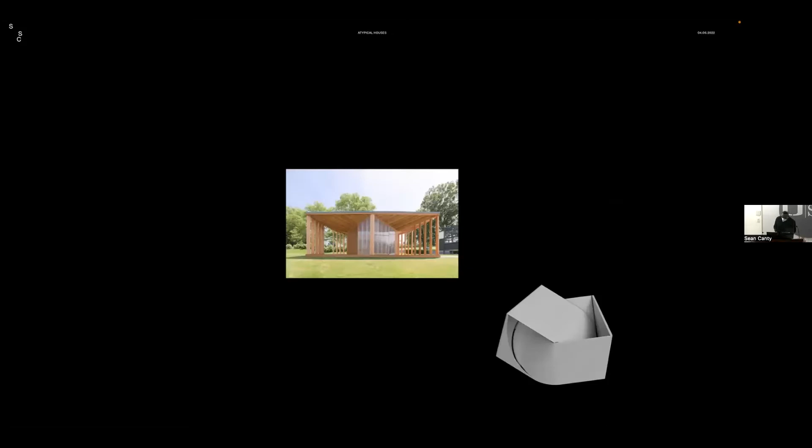The studio has worked on a range of projects over the course of the 5 years it's been operating, from pavilions to single-family dwellings, to multi-family dwellings, to large-scale collective housing, trying to find opportunities to interrelate the abstractions of form or geometry with certain conditions of typology, either as a kind of spatial organizer or sometimes the image of type. And how both of these things intersect to frame spaces that are social in some sense.

So there's a spectrum of projects I've been working on, some in the realm of speculations, some that are pavilions, which I call proto-architectures, and then buildings. I wanted to get started because the speculations and pavilions are quite important, and there's a mode of working in the practice that centers this idea of tangency.

As a way of, one, literally going off on a tangent and coming back to a kind of core idea, or finding continuity between different aspects of the work or different aspects of the discipline.

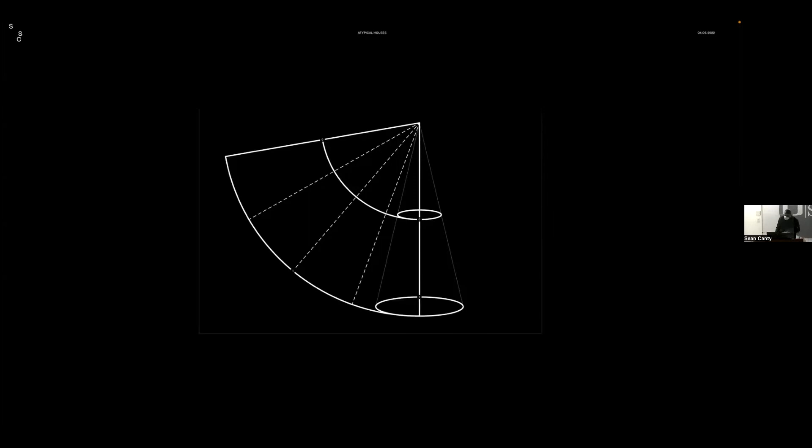And perhaps a precedent that always lingers with me is one I discovered as a grad student in The Projective Cast by Robin Evans, in the chapter Drawn Stone, where he articulates a story around this study that was produced by the architect and geometer Philibert Delorme.

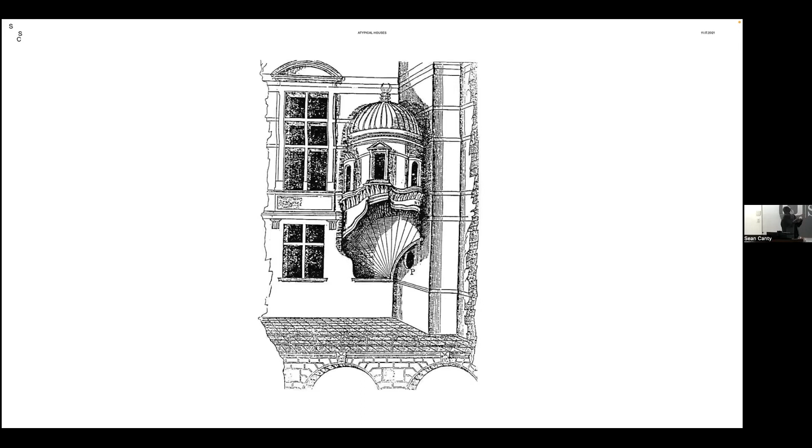And there was no space in the plan of the existing hotel to produce the study, and therefore it had to engage the corner. So it's a very peculiar condition because it's so miniature, a miniature piece of architecture compared to the hotel and the space of that courtyard.

There's a kind of paradox in terms of the scale, a paradox in terms of a room engaging a corner on the outside. To see a room in this way is kind of weird.

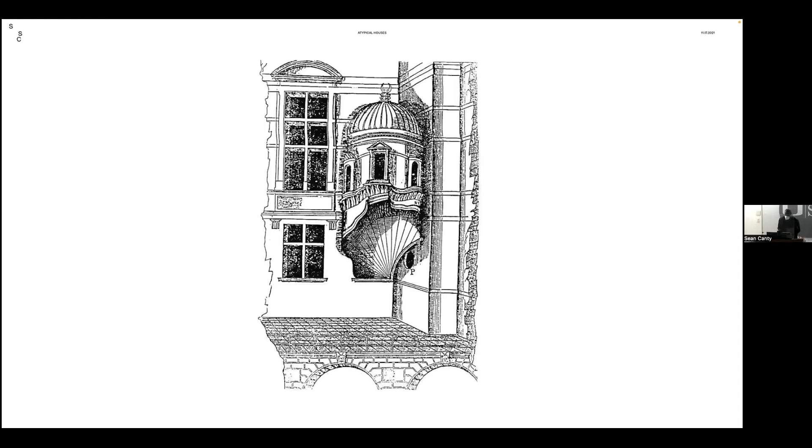And then the one that I like the most is this plan, these two drawings by Robin Evans, who reconstructs this process and beautifully renders this condition by which the conical arch structurally supports the tower of the study above.

And dives into the surface of the existing corner. So it reads as both, on the top part of the composition, as an additive condition, but beneath it, it is subtractive. And both of these perceptual readings can exist in one proposition.

That is in part through, well, there's a third thing. My speculation is that the reason why this is called Drawn Stone is not only because of the chapter being called Drawn Stone, not only because of the use of projection or unrolling to organize material on the flat plane, but also the way the architect treats the edge of the study.

It looks like a drawing that's been sketched in here, and it's a sketchiness that I love so much. But also this condition of building both additive and subtractive, or both-and.

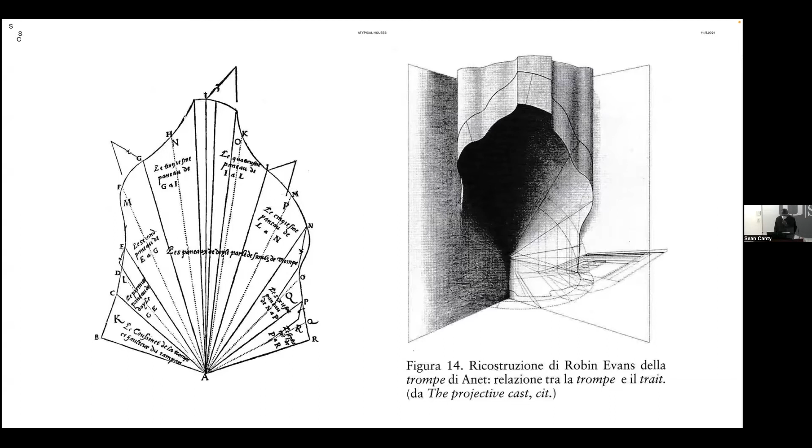So we love finding these anachronistic strategies of dealing with form and geometry, studying them and looking at them on their own terms, and then seeing if they have applications in some of the work that we might be doing.

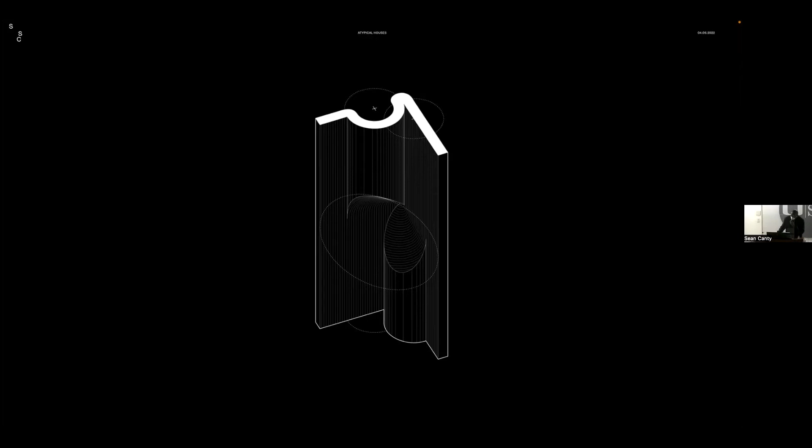In this case, we produced a series of corner conditions of our own that are misbehaved in other ways, where we kind of rub out cylinders into the flatness of a surface, and scale them in weird ways.

We double them up, we pair one and single out the other, or we have a kind of double scoop at the top and bottom.

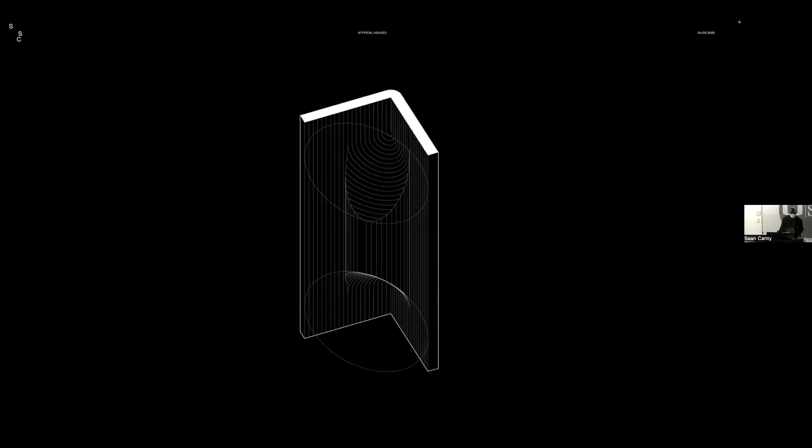This was a final drawing produced in 2D, which tries to begin to suggest the material organization for those forms, and it was submitted to an exhibition at the CCA in San Francisco called Drawing Codes.

Part of the research was actually looking at the kind of codes that Delorme was operating with at the time, using knowledge both in the realm of architecture and in the realm of stonemasons to produce that exceptional condition.

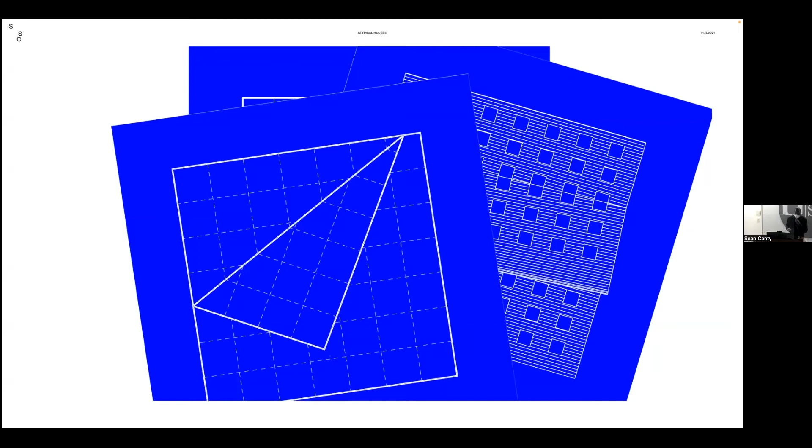We also do these kind of formal digressions as a side to the ongoing work, as a way of thinking in a very disciplined way about how to engage form, but also to find ways of relaxing it too, in a very disciplined way as well. So trying to be both rigorous and casual at the same time.

A project we're currently working on now is for a gallery in New York City, where we're thinking about this question of development at the scale of an object or a piece of furniture. This is the Swirly Stool and Table, where two semicircles of different scale sizes share a seam, and at that seam produces a fold that then turns into a vertical that supports the stool and the table.

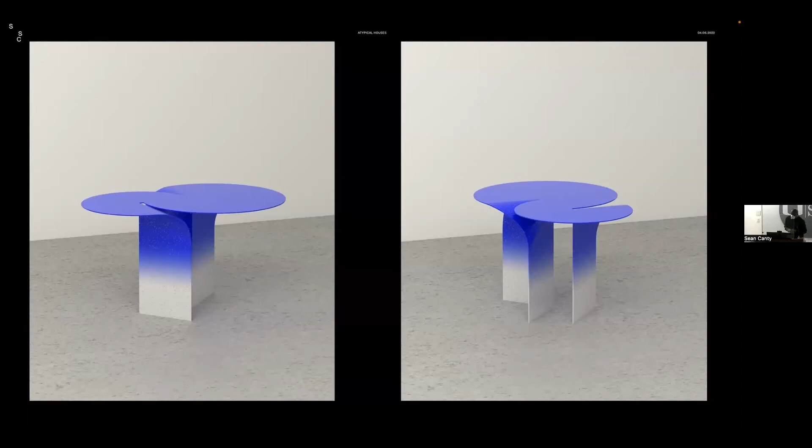We use color to highlight that moment of transition between the flat and the vertical, or the horizontal and the vertical, playing into the ambiguity of that transition.

A lot of the constraint is trying to get these things to constantly not self-intersect when they roll down into the flat plane, but that they maintain some logic of tangency in the unrolled state, so they can be made from a single sheet of material, in this case sheet metal. This is just a different version of that.

Last summer we also had the opportunity of participating in an exhibition called Not for Construction. As you can imagine, that's exactly the theme of the exhibit—to think about modes of drawing and representation that aren't output as architecture as a service delivered to a client or contractor, but more as a kind of intellectual conjecture.

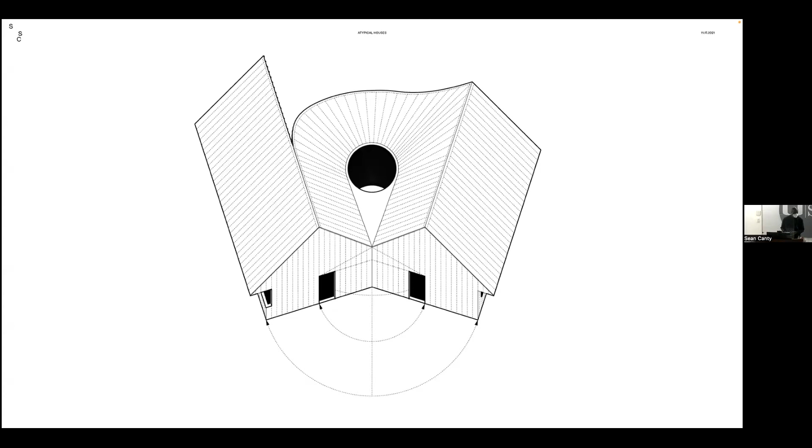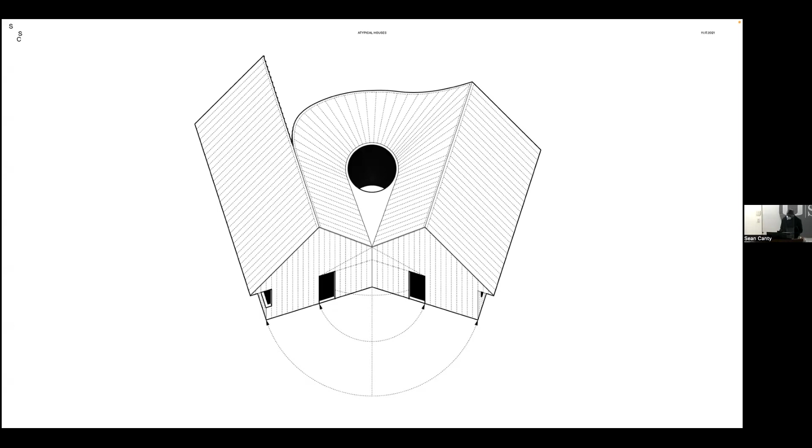In this case, we were thinking about the ways we might consider densifying suburban lots and revisiting typologies that aren't only single family housing, but thinking about alternative ways of living together. So the Janus House tries to conjoin two single family homes into one architectural volume, and in the process we were playing on questions of typology.

So we were revisiting a southern type of shed called the dog trot, where you have two twin gables separated by an open breezeway. It's very axial as a typology, and the breezeway is performative, cooling the house in hotter conditions.

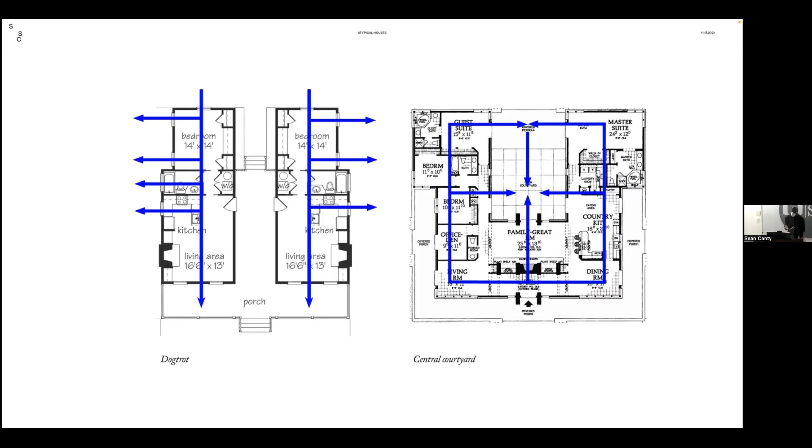And then the courtyard, which can be three-sided or rectangular or circular, but the courtyard always has a perimeter and a center. So how could we conflate these two logics into one house?

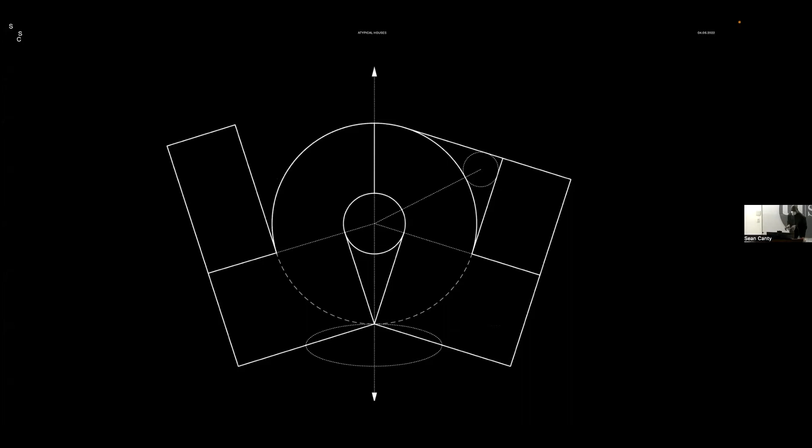So we start with the dog trot, and we inscribe a circular courtyard at the axis of the gable, and we fold the dog trot on itself so that it encloses that space of the courtyard, and the two sides of the house pinch together.

And even though there's some apparent symmetry, there are slightly asymmetrical things that happen between the left and right side of the plan. Private and public functions are divided: the darker half is more public, things closer to the entrance, and then the private living spaces are towards the back.

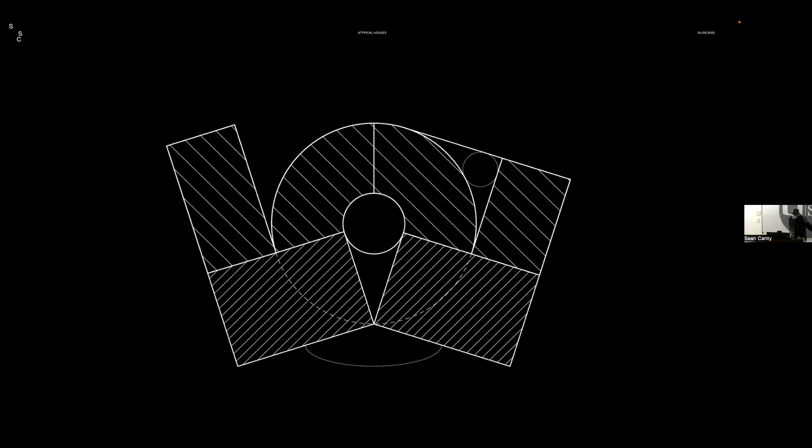And we looked at historical precedents of twins. We actually had a whole catalog of many twins within architecture. Twins and triplets are actually kind of funny when you think about symmetry or seriality as both formal devices, but also typological families.

So we were just studying how you can set up some continuities between the sides, and then make minor and subtle differences in the plan to both accommodate two different kinds of subjects, but also to think about the flexibility of the typological setup.

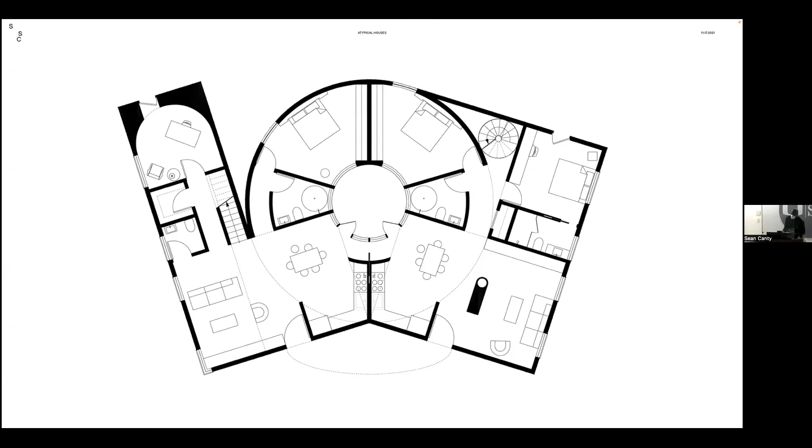We make lots of big scale models. Here we were trying to think about the ways in which the entry was produced, and we ended up settling on a kind of conical awning that connects the two doorways.

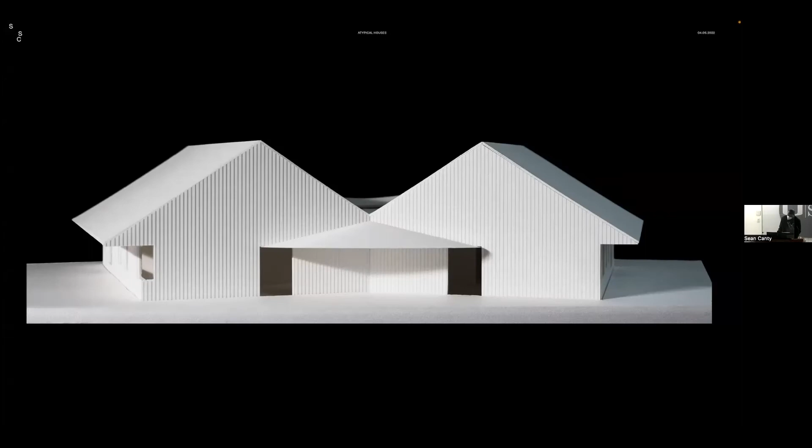Actually, this may have slipped down a little bit, but it was hitting the valley of the two gables before. So there's a kind of sense of familiarity on the front of the house, but a kind of plasticness when you turn around the back.

We were also thinking about how we could maintain this degree of abstractness through normative, used materials. So we were looking at standing seam siding and roof, but thinking about differentiating tone, sheen, and matteness or finish to register some difference between the base and the roof, and also to allow the house to stand out in the greenery of the landscape of the lot.

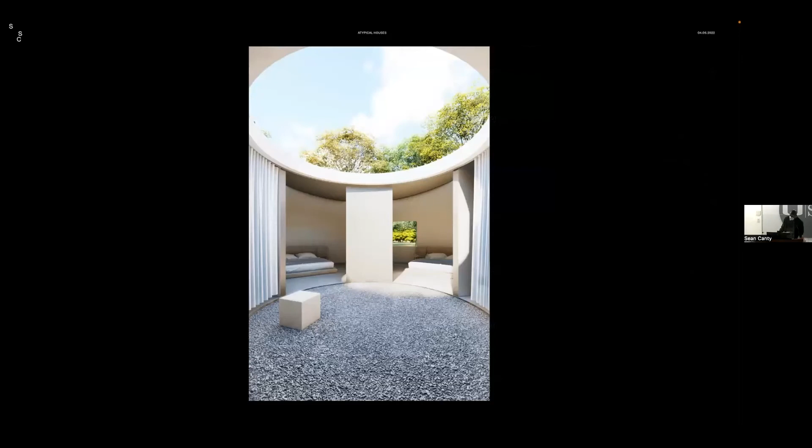And then this is a view that centers the subject right at the fold between the two sides. And here we can see how the two bedrooms look out onto that centralized courtyard.

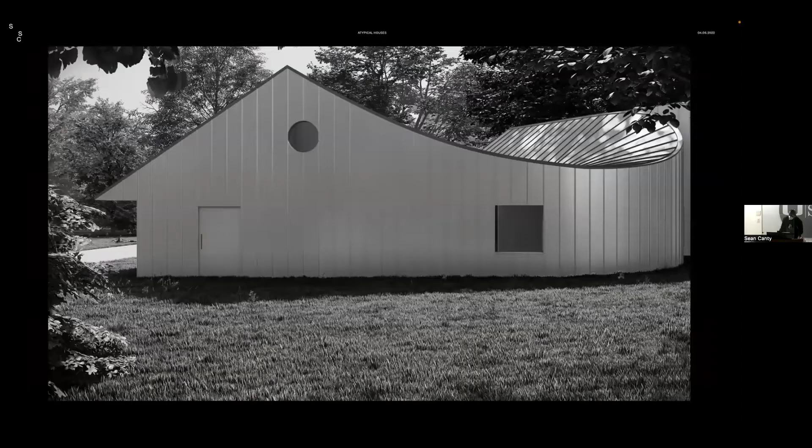So the next project is called the Folly Pavilion. It was a project that we looked at to think about how we can look at vernacular and normative construction methods to produce curvature. In this case, we were looking at the ways in which contractors or tradesmen build turrets through standard 2x lumber, and speculated on what happens if we blew that process up, made it bigger.

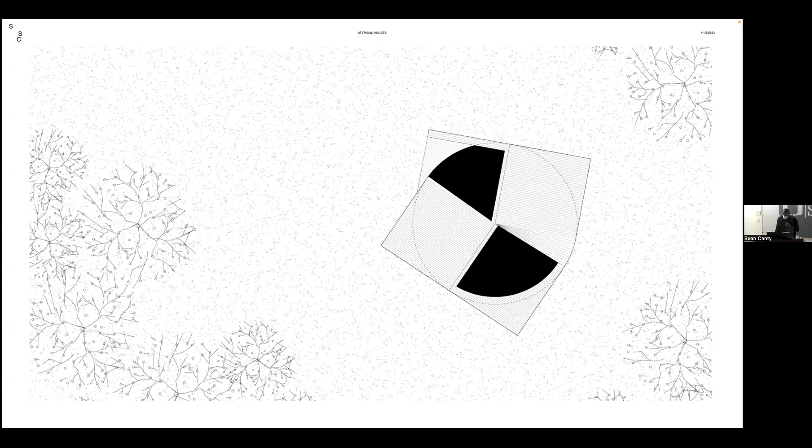So we started with a simple diagram of 4 pinwheeling walls that would support the dome above, and then slightly tweaking or rotating that so we can instill some degree of hierarchy between the sides. So in just that subtle rotation, we now get something that is scaled like a door on the right side of the plan.

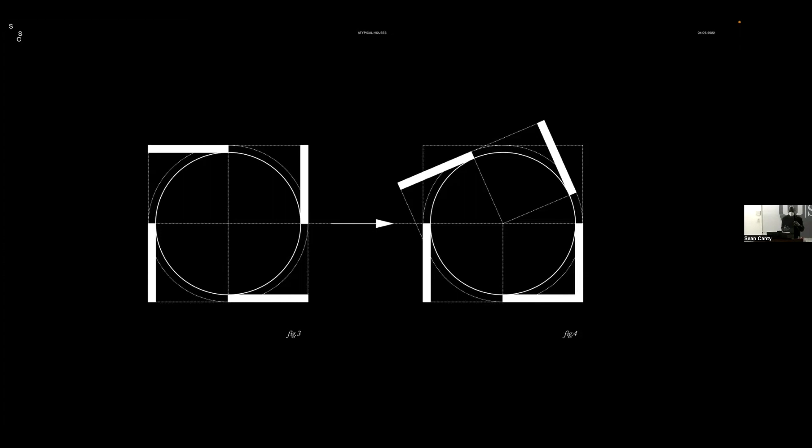Two large openings, one that is slightly oblique, and then another kind of awkward entry from the left. So just through that kind of, we did a bunch of studies of tweaking the diagram to see what kinds of approximations of thresholds we could get: door, window, big window, small window, without much effort.

This is the final plan. So the black circle in the middle was meant to be a kind of reflecting pool that can be covered up and function as a stage. There's a small space for seating, and then the four different openings.

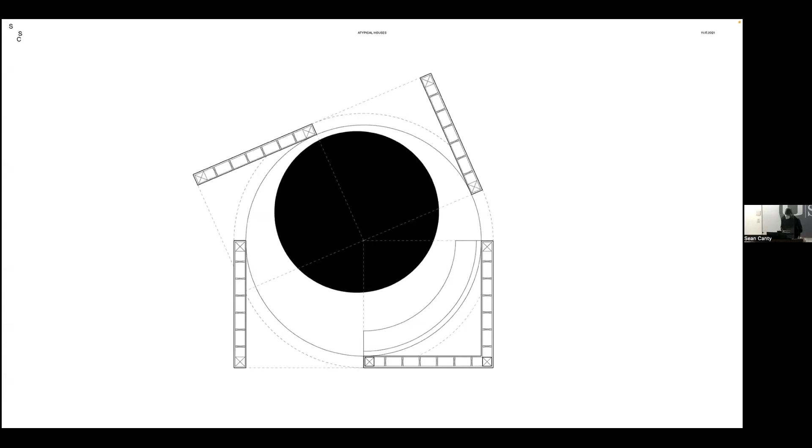And so as you move around the pavilion, you are seeing and viewing sometimes the shed and sometimes the dome. There's a kind of game of peekaboo that happens where the shed is coplanar with the surface of the cone through tangent planes, and then sometimes the cone pulls away and tucks in, animating the facade.

So here you can see the ways in which those two geometries are entangled from the roof plan, made evident by, on one side, the cone carving away at the shed, and on the other side, the shed allowing the cone to enter into this rectangular threshold.

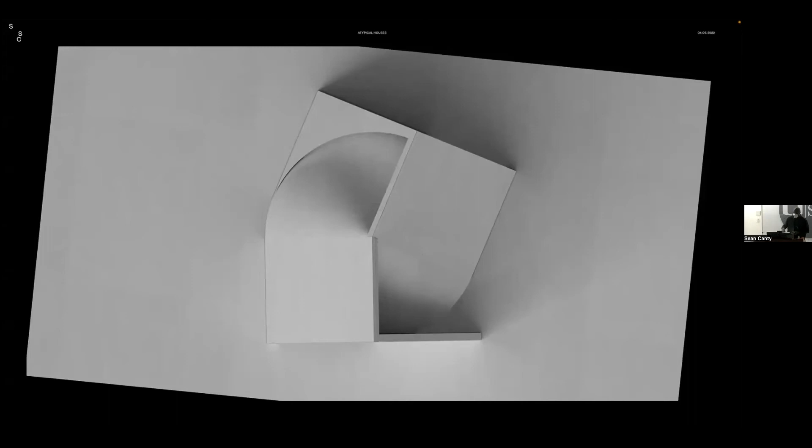And on the other side, this is manifested through 2 sibling oculi or openings that bring daylight into the plan below.

And this is a moment, or kind of an ambiguous moment, where I call a kind of tuck, where the gable begins to tuck into the interior of the cone, or the cone folds out into the gable.

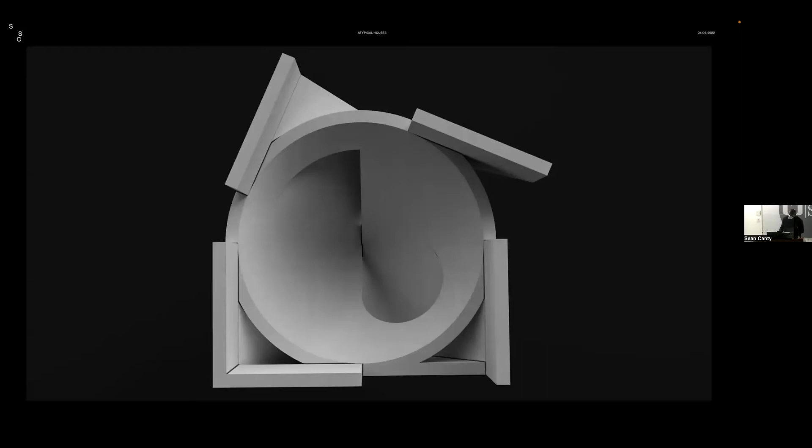That was done through this process of flattening and unrolling and trying to reinscribe those geometries, drawing those geometries on the surface of the cone, and then projecting it back up into the folded condition, or the formed condition, I should say.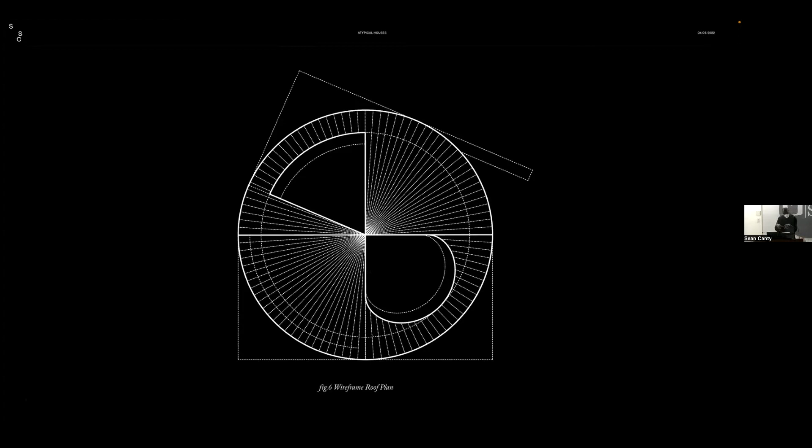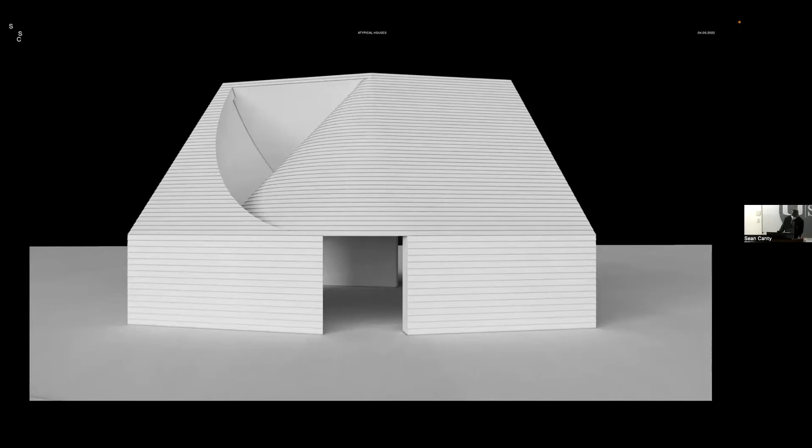And so it maintains a kind of sense of abstraction. Obviously you can see here we were playing with thinking about material siding, or steam-bending wood siding, to play with kind of, to be a play on vernacular materials. But in the end we end up thinking about something much more abstract and mute to play up that ambiguity between the 2 forms.

And so it feels like a kind of small house on the outside, but on the inside, through the concavity on the underside of the cone, it feels monumental. And so there's a kind of play on scale between the inside and outside that is quite surprising.

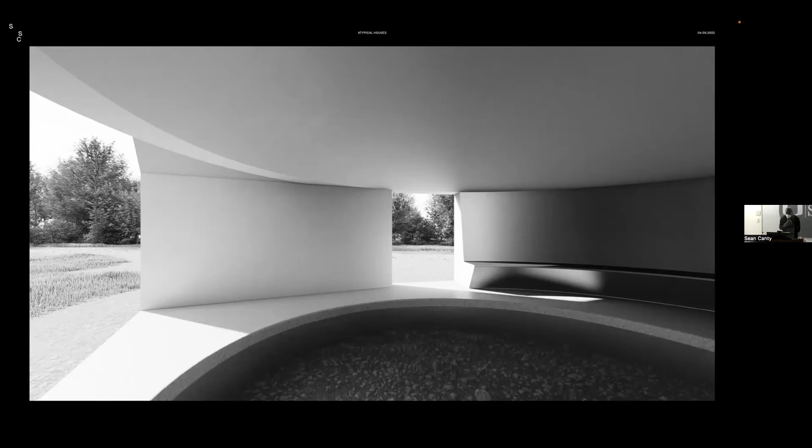And then here we can see that moment where the two fold into each other to bring the light into the center.

So those kinds of ideas around envelopment, continuity and discontinuity in Folly Pavilion really informed the study of thinking about stealth density on a suburban lot in Concord, Massachusetts.

And deploying the conical hinge at a different scale. In this case, it's actually at a much larger scale, thinking about how it could be used to separate and connect two wings of a house—one a two-story residence, and one with two flats on the other side. The space in the center would be a commons, allowing renters to have a larger space to engage with each other and with the family that owns the single-family house. So we looked at different tangent studies of jostling the wings around the circle.

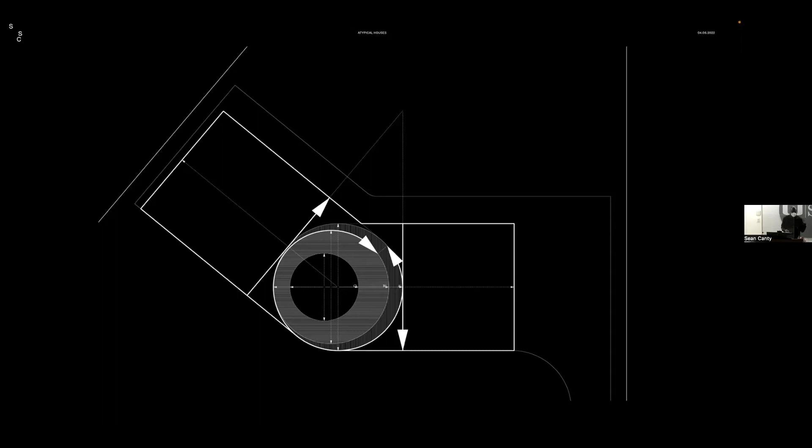This is the plan. You can see the two-story residence on the left with its own internal staircase, a one-story flat on the right, and the commons in the center. Here's the upper level of the two-story residence, and on the right, a smaller flat.

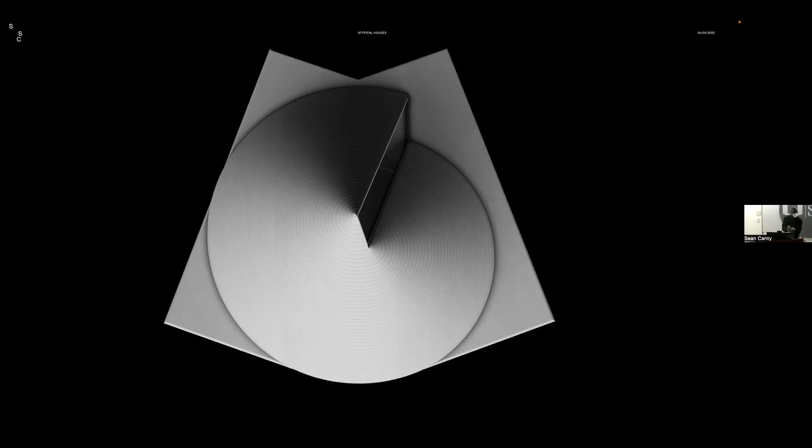In this case, there's a kind of dialectic between the smoothness of one side of the house and the coarseness or chunkiness on the other side, because of that site condition of the bend. As a way of engaging those two languages, or those two opposites—versus the Folly Pavilion where there's one single cone—here we stitched two cones together and slid them down a seam to produce an opening for skylight that allows light into the commons.

That has been situated inside of a normative gable. This is a view inside the commons of the staircase leading up to the mezzanine level, but you can see that crack or fold in the surface above that funnels light into the center.

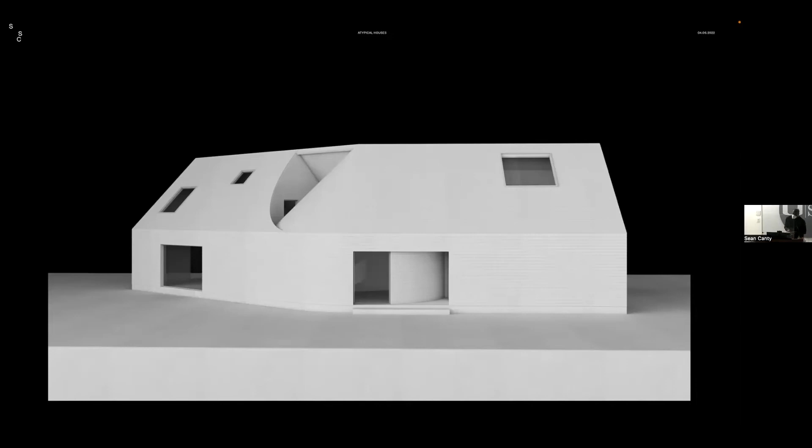So the front of the house is mostly abstract and has very little openings or windows, but around the back it's much more punctuated. That oblique skylight is the only oblique condition, but it participates in that language of openings on the back side, that kind of porosity—the difference between the front and the back.

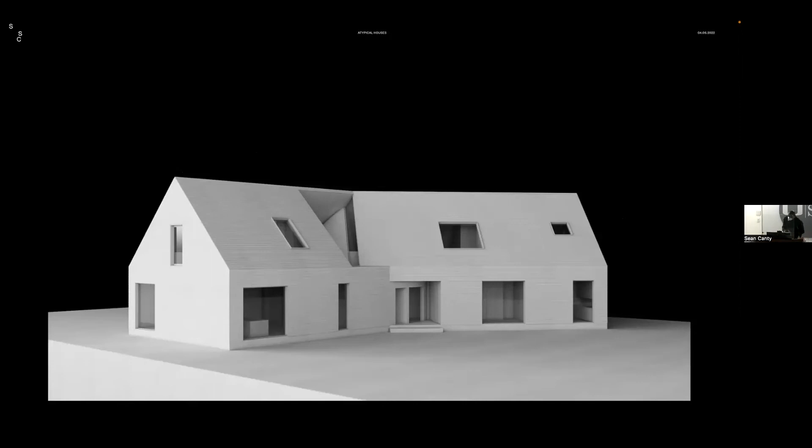This was a research project we did last summer that ended up being in an exhibition at the Museum of Modern Art. It's called House Block Commons, situated in Philadelphia in the Cobbs Creek neighborhood. Here we were exploring questions of collective housing, of climate and resiliency, and of social justice, which hadn't really been a preoccupation of the practice until we did some research on this site.

This site once housed a group called MOVE. They were a group that at the time was seen as radical—I think some of their ideas probably wouldn't be so radical today. They had really different ideas of communality, of our relationship to the earth, to landscape, how we eat, and were very much anti-capital, anti-government, and therefore had conflicts not only with the local authorities but with their middle-class Black neighbors.

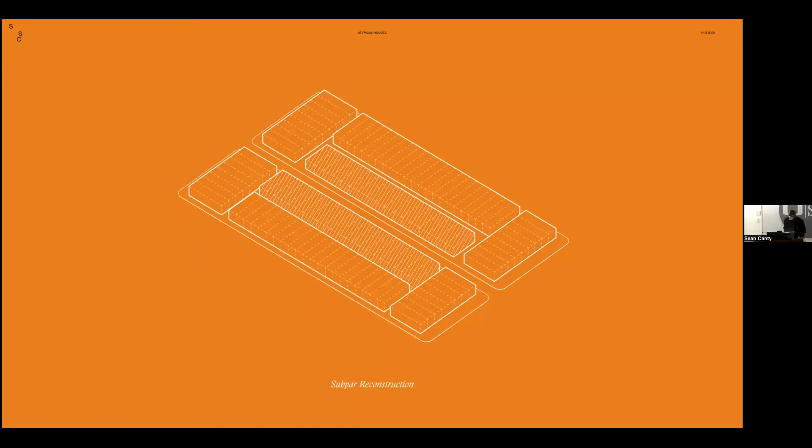So this was the site before the bombing, the site after the bombing, the subpar reconstruction. We decided to do a series of block compositions to think about how we can bring back the density of the block that was formerly there, and how we can also integrate strategies of green space to cool the block and make it more resilient, as it will be more prone to flooding during storm surges.

A lot to take on, but this is a study we're exploring, breaking the street wall and checkerboarding the open space, really amplifying that sensibility.

And then at some point we decided maybe it's not a good idea to build back at the site of the atrocity, and maybe it's better to leave it as a void space. And maybe that void space might be an opportunity to think about how we could tackle some of our climate desires.

So this was a kind of Courtyard Block, which maintains some degree of the street wall, some degree of entry to the center, and preserves the original site.

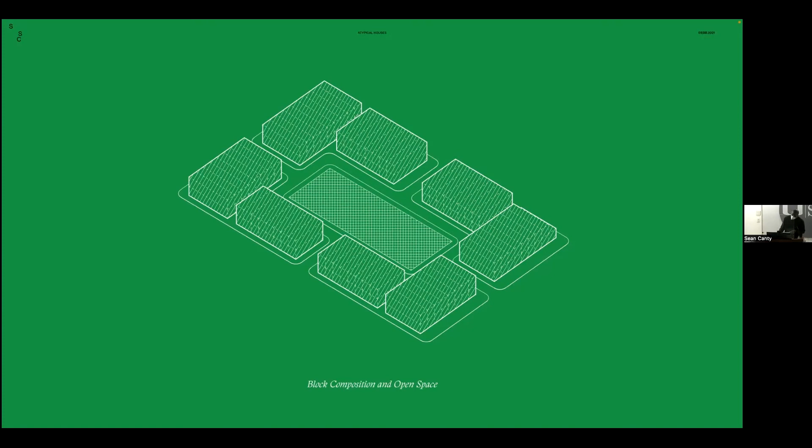Here we angled the street wall a bit for daylighting and shading purposes, but we have the street cutting through the courtyard.

And here we decided to enclose it again and allow it to be a space of recreation, but also a space that could tackle some of these issues of climate through landscape.

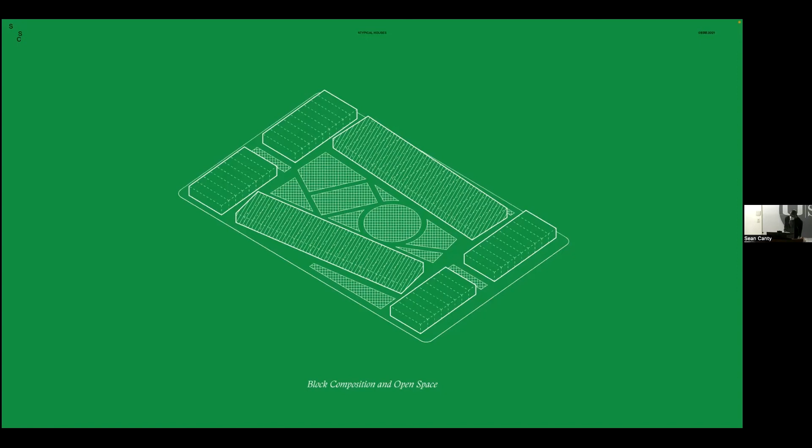And so we did a series of analyses of the proposal - if we have more greenery versus less greenery, the tilt - these are just a few of the outputs of that.

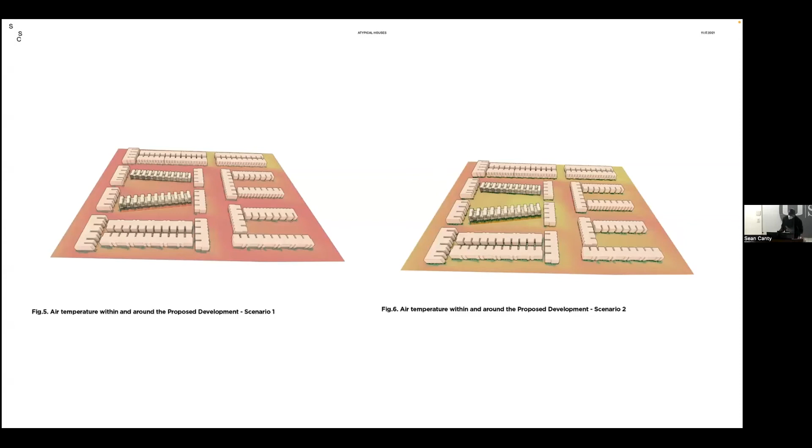And eventually we arrived on these particular angles and this organization, where we have a space of recreation and a space of leisure at the center of the block, but also maintaining a sense of the void that was once there. And then a series of housing that combines single family homes, duplexes and triplexes to re-densify in those two bars.

And we produced a series of drawings. This one in particular, which was exhibited at the Museum of Modern Art, in which we were looking at the front and back of our new proposed housing type and thinking about how we can articulate a material - our material proposal, which was mass timber cladded with brick.

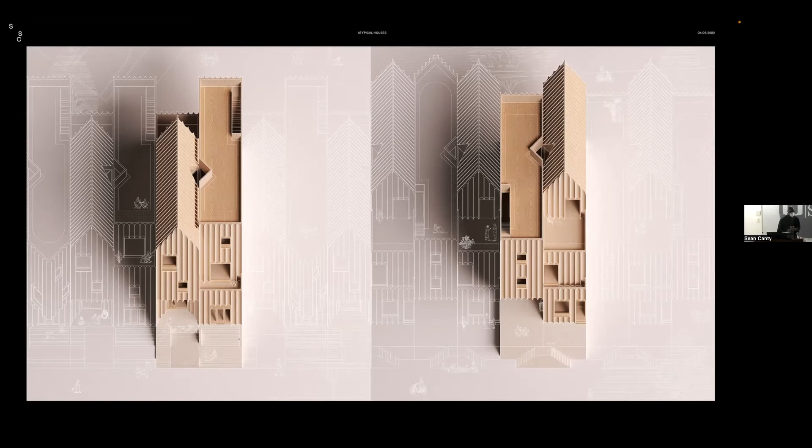And then also how can we articulate the social life of the block that we imagined through the line drawing, and trying to bring back some of those typological elements of the porch, the stoop, and the yard.

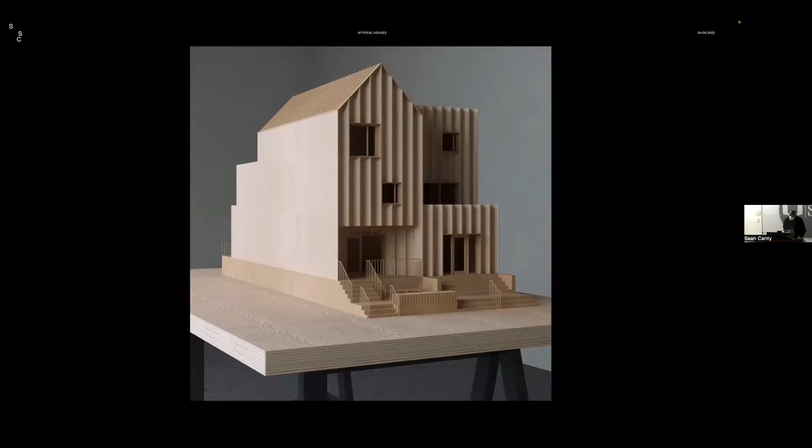...terraces, which are a little uncommon in that city, but could allow some relationship to the green space for owners and renters on the backside of the block.

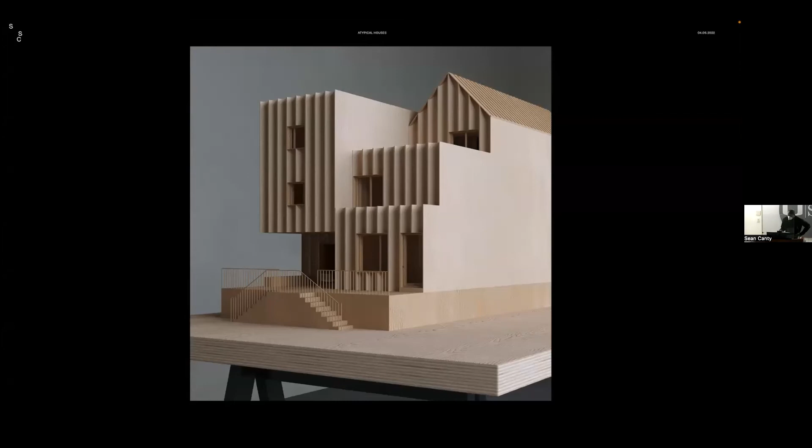And also reducing the fenestration to control fuel poverty, and increasing the height of the podium to address storm surges and flooding. So very simple moves, but hopefully with maximum impact.

These were the plans of the housing types. Along the party wall, there's a rotated light well that allows for chance glimpses of your neighbors across the way, but also a way of insulating the space and bringing daylight to a particularly deep plan.

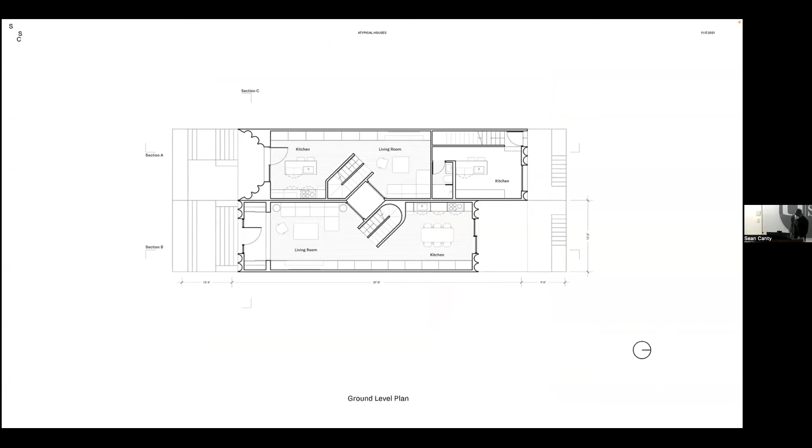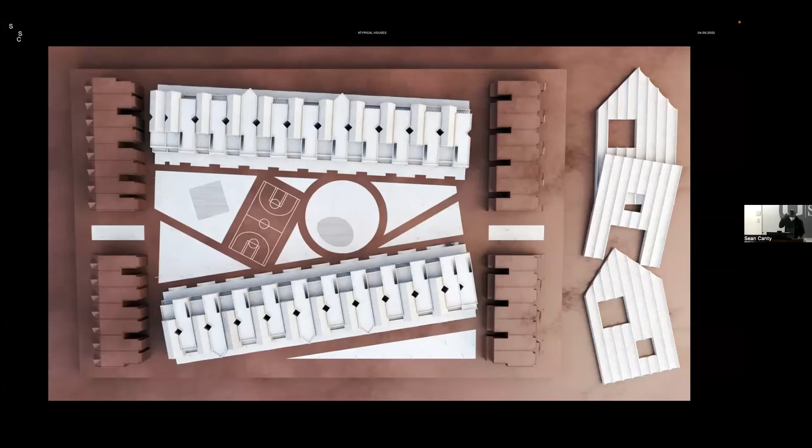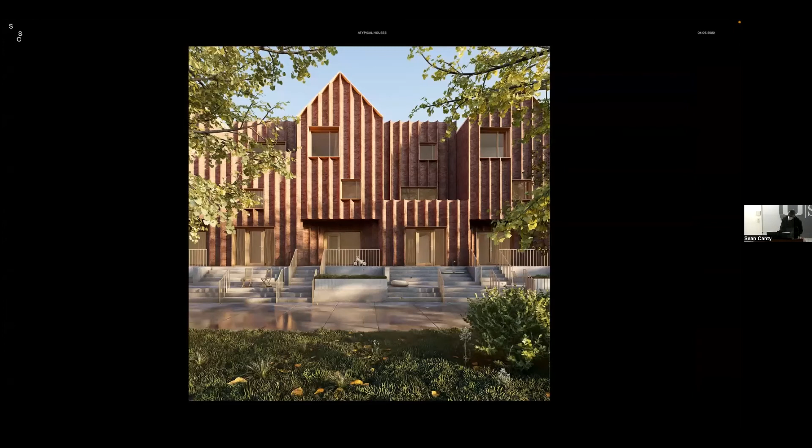We did lots of models. In this case, this was a digital one where we were looking at the relationship of the facade to the composition of the block, and then a series of images to think about the quality of material and light and the street, and the kind of perforated street wall of our proposal. And then this is the backside of the block and the space of the commons.

And I think, how am I on time? Good, okay.

So that was a really exciting project to think at a larger scale and to think about the ways in which type and form are also trying to reorchestrate the social, particularly in the case where the social life of the block was no longer there, and trying to think about questions of climate.

In this project, we were working on a single family home and thinking about the ways in which, in New York, a space of work could be integrated into the space of domesticity. This is called the Barrel House.

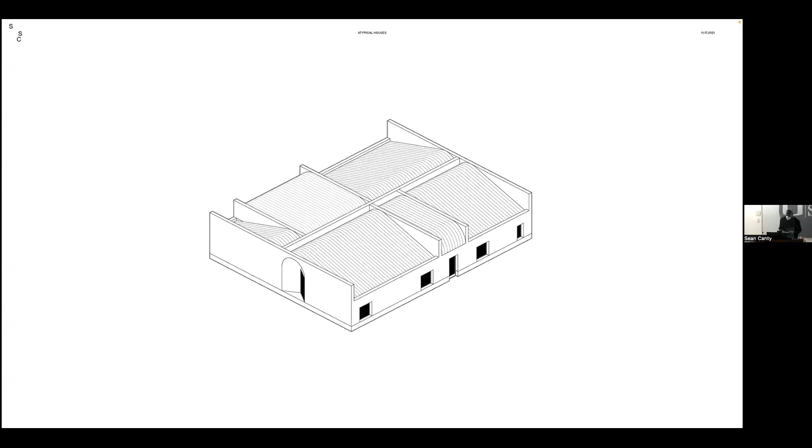We were really interested in a simple diagram of two barrel vaults that kiss at the center, but that organizes the spine through the house. The house in plan, and then the roof plan, oscillates between a 9-square organization and a 4-square organization. That's made even more ambiguous through the barrel vaults, but also planes, or slope planes, that tilt from the center to the periphery.

So these are the two vaults. These are the walls that support and subdivide the rooms, but also support the house structurally. And then these are the tilted slope planes between the structural pier walls.

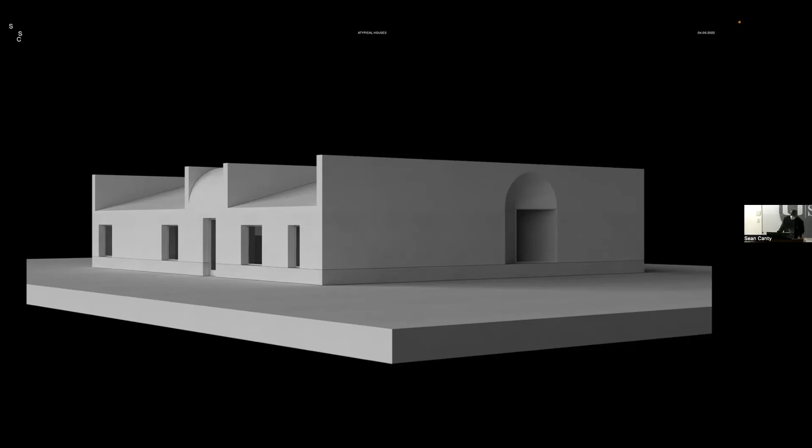We were really interested in playing with this idea of a thick surface, and a volume that's sandwiched between that thick surface, trying to oscillate between those two worlds when looking at it from the short elevation versus the long elevation.

This is the plan of the house, so it's organized in 4 quadrants, with the two vaults down the central spine, and they intersect in the center at a foyer.

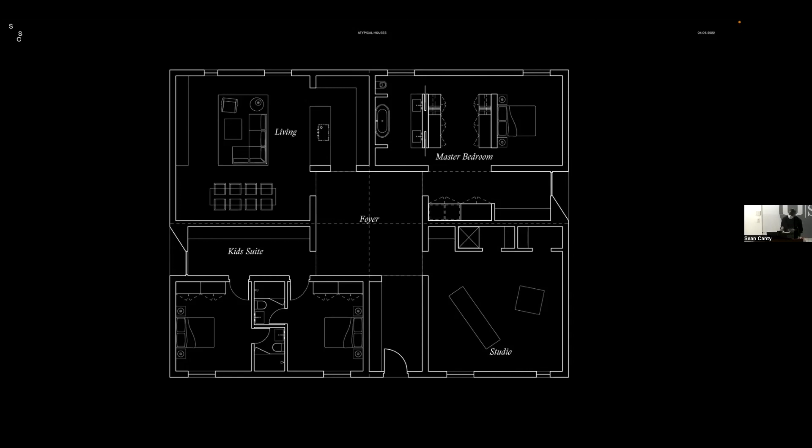That was a kind of space given that the house is so introverted and segmented into quadrants, that the foyer is a space where sight lines are kind of more leaky visually.

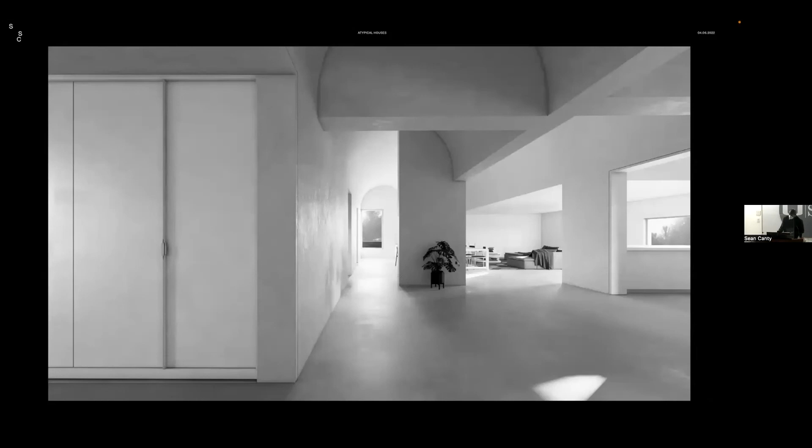And so this is coming in the entryway. These are the spaces of the barrel vaults, which house supporting programs like a study or storage.

And this is looking the other way at the foyer, where the client wanted the studio space, which is in the lower right quadrant of the plan, to be integrated into the house.

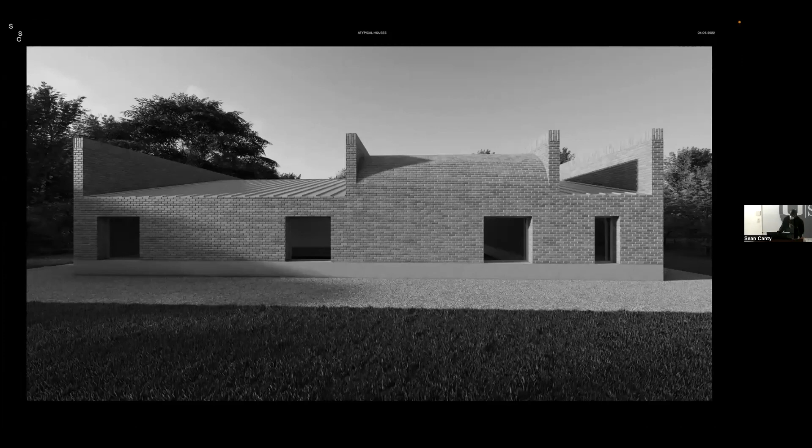This project, this was something that we did not get, but nevertheless led to a set of research that is still ongoing, and it has been quite fun to work on.

We were invited to think about a house for two brothers on an estate in upstate New York. They call the estate the Art Farm, and it houses large-scale commissioned pieces of art by artists that we all know and love.

And they wanted the house for themselves and their families, and they wanted to be together because they're very close in age, yet they wanted some degree of separation because they're not always so nice to each other.

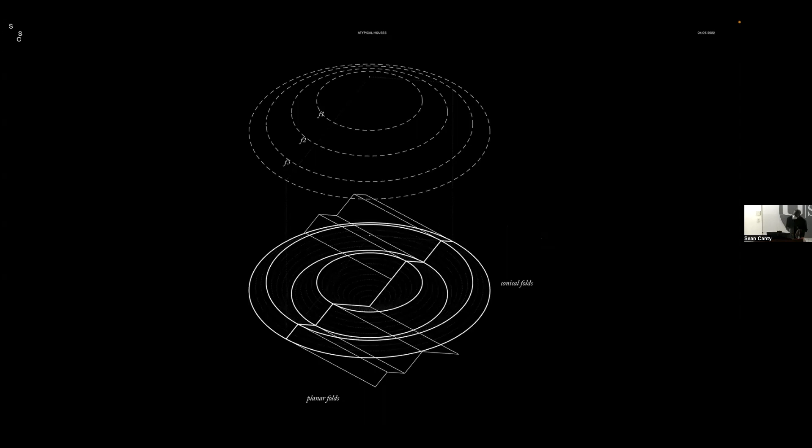And we started the process by thinking about how to stiffen the surface through folding. In this case, we were really interested in a logic of curved crease folding. So we started with the idea of how can we make a kind of abstract geometry feel slightly familiar by folding it to produce something that looks like gables, but it's not quite gables.

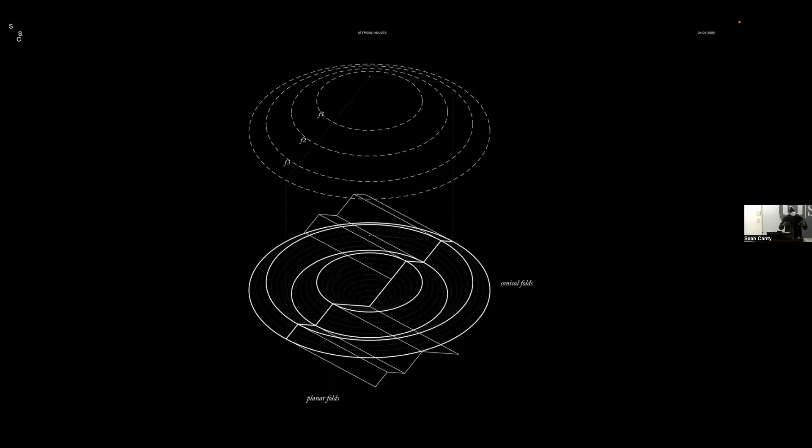And we did that three times. And then we intersected those folds, or took a section of those folds, and extended those to produce planar folds. Through that process, you can also get a lot of graphic patterning on the surface of the folded cone.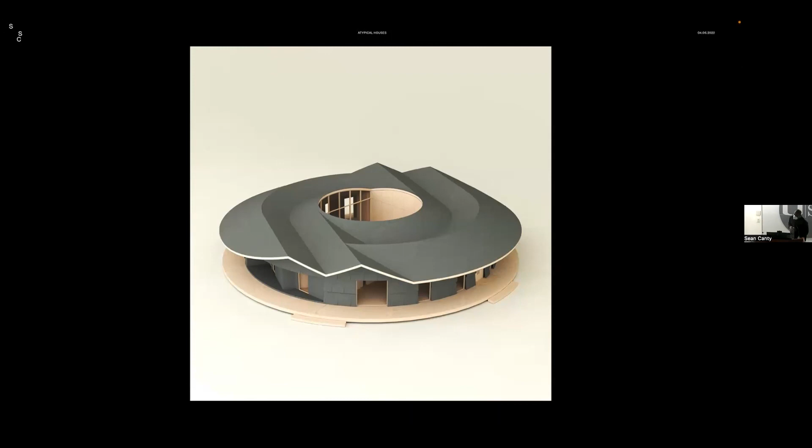And so we were looking at stress skin construction, which is essentially a kind of sandwich of lumber between plywood, and its potential to be prefabricated. Using a kind of low-res craft and material techniques, but having a high degree of fidelity to the original geometry through the prefabrication process.

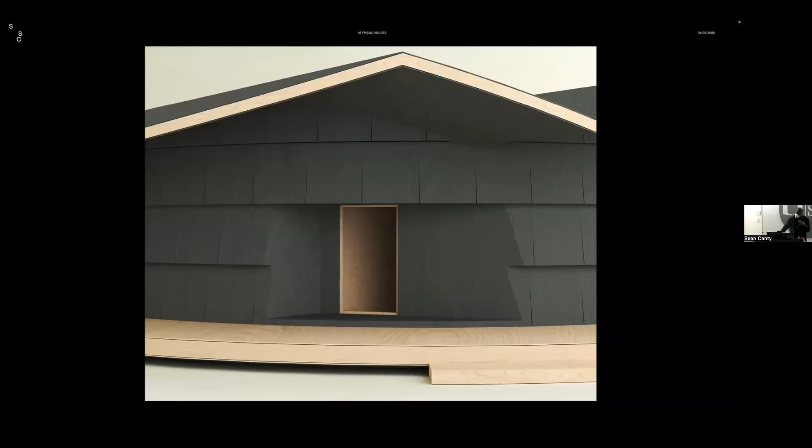And also trying to get the house to mirror or reflect that idea of the sandwich at the scale of the whole house. So there's a kind of large scale wraparound porch that becomes another social space for the house, but is in line with the roof above, which overhangs quite a lot, and engages these kind of micro porches that spill out onto it, connected to rooms.

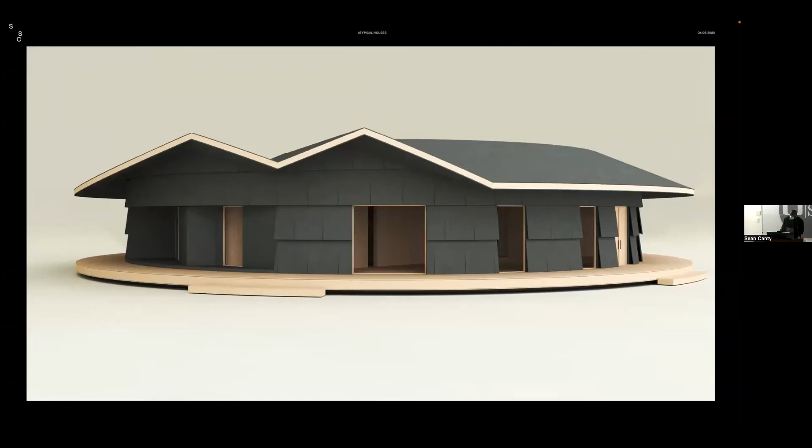And so these are some images of what we're doing in the office now, trying to think about materiality and scale. We're thinking about a kind of large scale plywood, chunky shingle that slightly breaks as it curves.

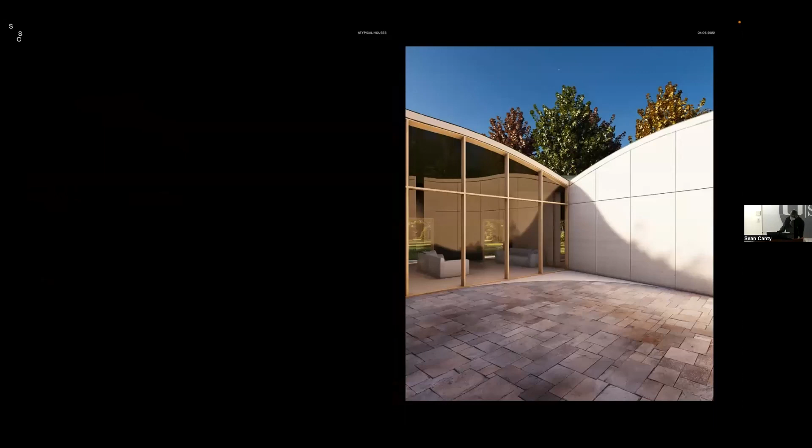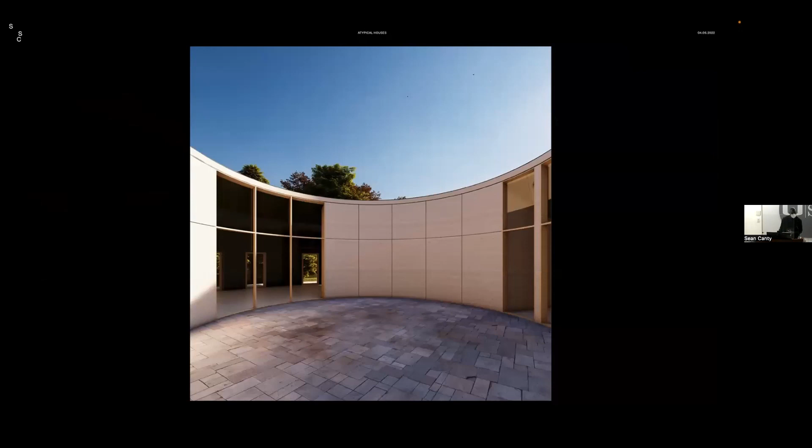And these are a couple images of the courtyard from one end and then the other. We tweaked the courtyard in a way that the sidedness of it felt slightly special, in particular for the occupants, even though it was this kind of shared position. And we found that the porches on the outside, because of the scale of the curvature, even though it's a kind of collective space, feel more private because of its adjacency to a room right next door, versus the courtyard feels very open to the public at the center of the house.

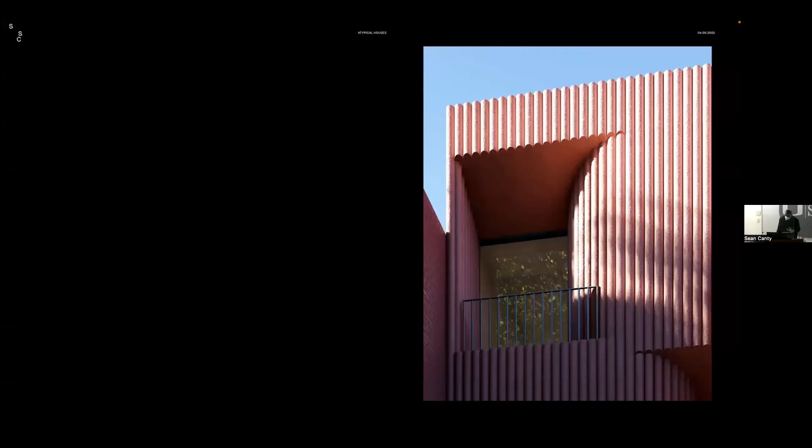I'm going to skip this project and move to the last one because I started a little late. The final project is a pavilion that we worked on during the pandemic. It's called Edgar Shed. It was to be built on a site in the Seaport area of Boston, and the only requirement was that people could safely gather during the pandemic. So it had to be kind of open. And in thinking about how to produce a piece of architecture in the public realm...

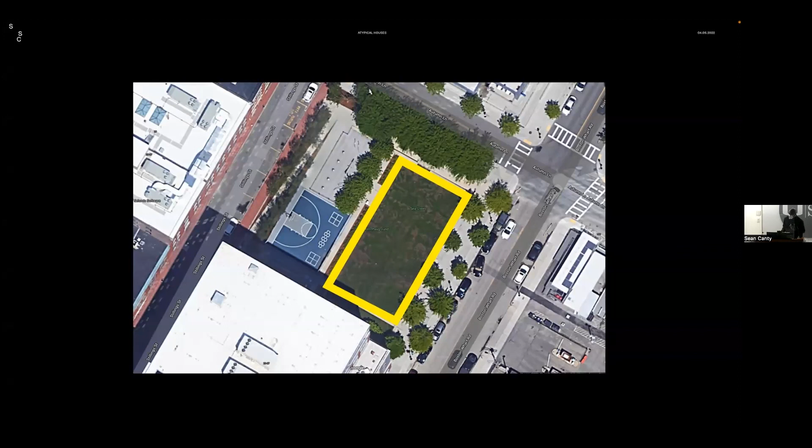Our idea was, what if we took a gable and rotated it so much that one side became a facade and the other side opened up to allow for a space of entry. The idea was to take that simple figure but try to produce variation or subtle differences in plan. So the gable is supported by two walls that pivot around a kind of central circular interior - one wall parallel to one edge of the gable, the other slightly oblique.

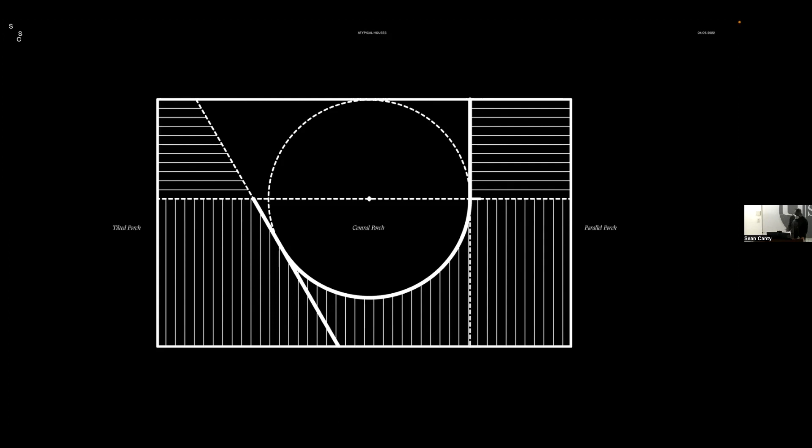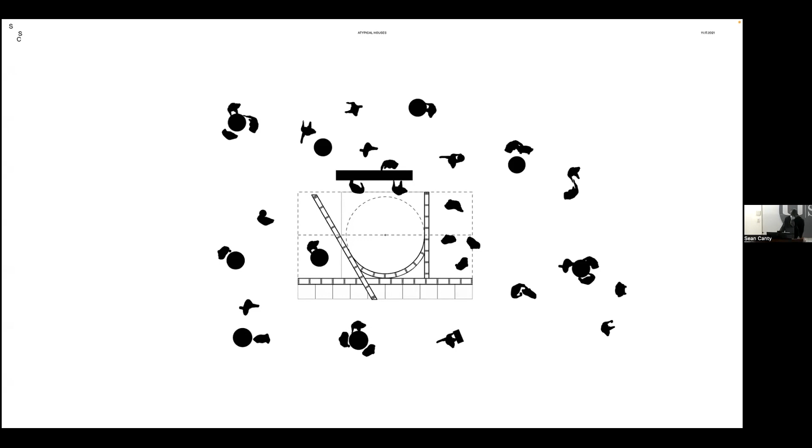So we get what I call these three kind of porch conditions: one that's tilted and perspectival, one that's in the round, and one that's in alignment with the roof. And we tried to play through certain kinds of socially distant ways of gathering - in this case, thinking about it as a space for cocktails, perhaps a space for performance, or just a space to be in contemplation.

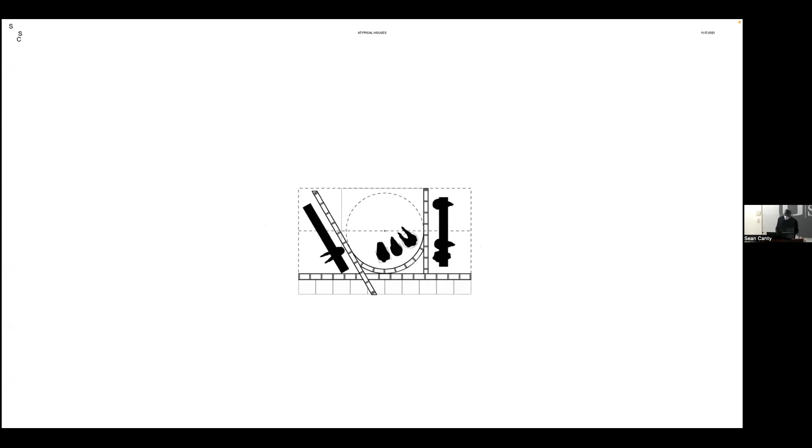So this is a kind of bird's eye view of the proposal, and this is a worm's eye view of the proposal. Really thinking about just very humble two-by construction, and the use of texture and color as a way of making those known materials feel a little special.

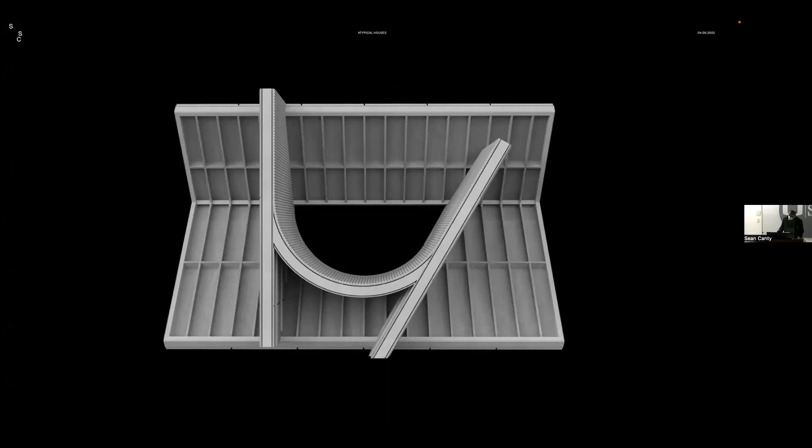So the whole thing is also a little furry or hairier than some of my other proposals, but really trying to use plywood at the scale of a shingle, an overscaled shingle, and allowing that shingle to fold with the walls, and also to be exposed so that some of the logic of construction is actually on display for the public who may not know anything about architecture, but might understand something about this assembly through the ways in which edges are purposely revealed.